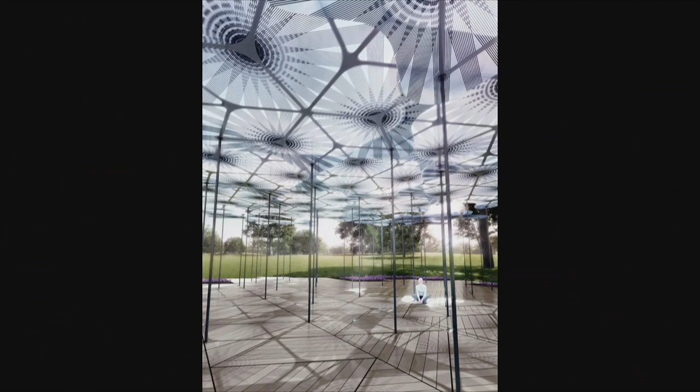the rain in at the edge, and that it would be incredibly delicate because we want this pavilion to sway in the wind. And the columns that support the pavilion are only 35 millimeters in diameter. And so when there is a wind, the whole structure sways. What's nice about a pavilion is you're not constrained by the usual constraints of buildings. And so the idea that you can design something that will respond to the climate became very important to us.

So this is the first render that we did, and we'd imagined this series of interlocking petals and very slender columns, and that the petals themselves would be translucent, but they would also let light in between them around the edges. And we had a hunch of how to make this, but we'd never done anything quite like this before.

And I was very lucky that when I went for my first meeting, I was introduced by Arup, the engineers we work with a lot in London, but who also have an office in Melbourne. They introduced me to a specialist boat builder, started in the boat building industry, who work specifically with composites.

And we had a telephone conversation, because actually they're not based in Melbourne, they're based in Brisbane, about whether they were up for experimenting and exploring if we could create these incredibly fragile, slender petals that would let light in, but that would be stiff enough. And they were remarkable collaborators. And the solution that we came up with really was a collaboration. We could not have done it without them.

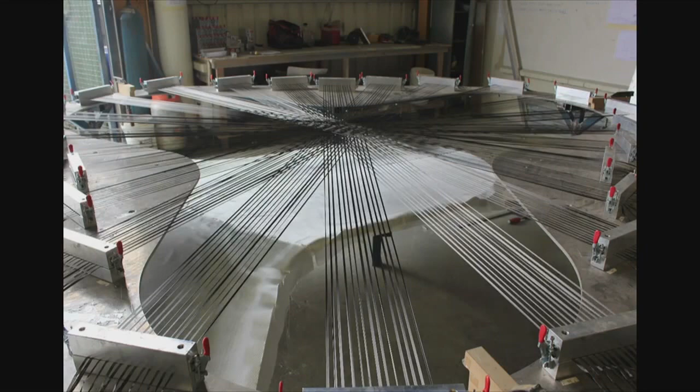So the idea was to use a translucent resin and then to put into that translucent resin carbon fiber strands that would stiffen it. And what was so extraordinary is when they started to experiment, because nothing had been done like this before, where you're using strands both as a decorative but also a structural material, to find the right degree of set of the resin. Because if you let it set too soft, the carbon fibers would just sink to the bottom. And if it was too hard, they would just float.

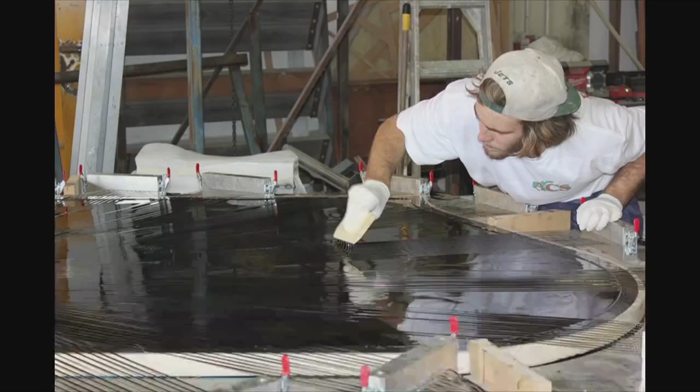And through a series of experiments, they realized that the only way to do this was to do it as a continuous process. So they had a 24-hour operation, and they worked in shifts. And to do something that pushes the boundaries, you need everybody to participate and to be as enthusiastic and as curious as you are.

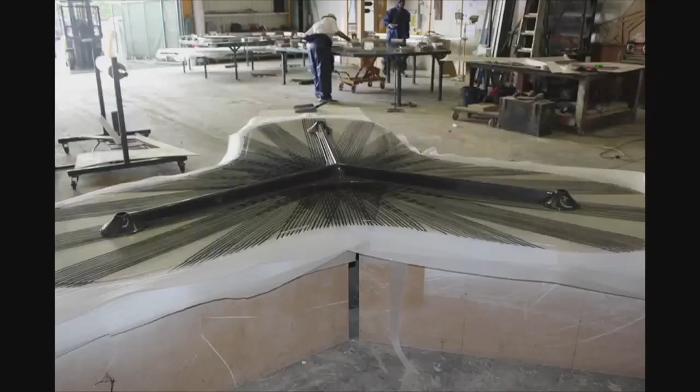And so the makers of our buildings are as important as the engineers, as the client and everyone else. So you can see how it's quite a kind of hand process. And then the carbon fiber ribs that connect the petals were actually vacuum formed. And there you can see a completed petal.

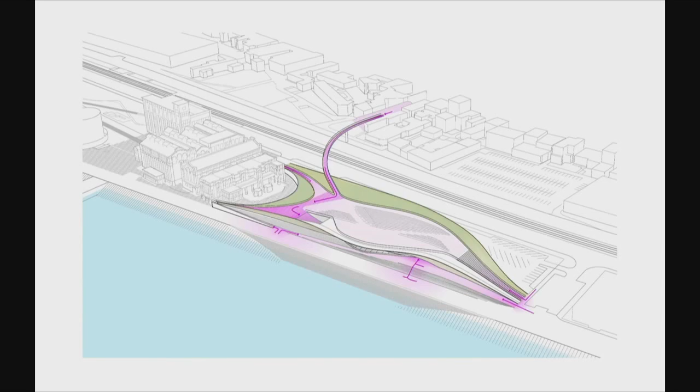And for a long time, the riverfront has been without any animation, without any activity. And this building, in a sense, consolidates a citywide initiative to regenerate the riverfront. There's been a lot of money invested in it, and this is perhaps the kind of finale because it is a destination in its own right.

Because it's next to the power station, there is a substation that actually sits below our building, and our building kind of sweeps around it. And that had to be moved, and that formed part of our project. And that power station actually powers the presidential palace, so it's quite critical that it

functioned at all times. And you can see how, with the sweep of the bridge and the gentle curve of the embrace of the substation, how the form of the building kind of emerged out of the constraints of the site, but also the movement along the site.

So what you're seeing here is the roof, and the bridge connects to the roof, and as it goes over the railway tracks, it lands in a newly landscaped square. But there will be no steps. Because of the height differential, you'll be at grade. So it's completely accessible in a city that is actually very difficult for people who are disabled or people with buggies. There's 7 hills, and it was important for us that this was a very accessible building.

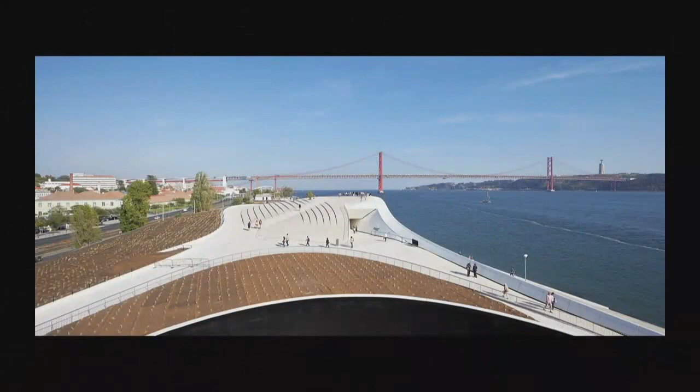This is the photograph of the roof. The brown will eventually be grass, but it's just newly planted. And the steps are facing down towards the city, so that when you're on the roof, you can not only have views over the river, which are fabulous, but you can also look back to the city, which is a perspective that has never been open to people before, because you couldn't get high enough.

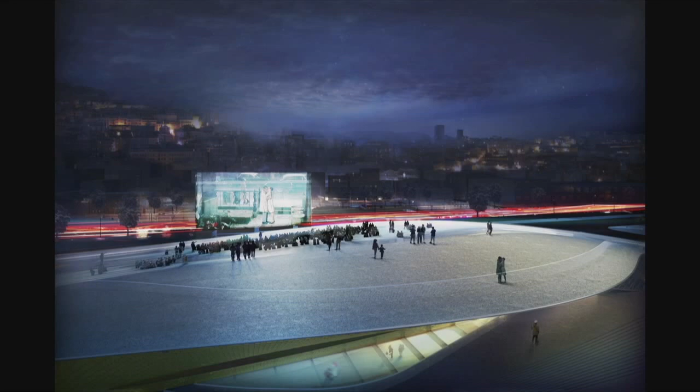But we wanted the building to be very low in order that from the river you could still see the old city, and in the old city you could still see the river. And this was an early montage we did, proposing that during the summer months they will install a screen and show movies with the backdrop of the city. So you have both a physical link to the city, but also a metaphorical link to the city.

And the relationship with the old power station is important, because that power station is part of the wider art campus. And our client, EDP, who are the biggest energy providers in Portugal, they have a foundation. And this building and the whole art campus is about a privately owned utility company, actually majority owned by the Chinese now, giving back to the city.

And I think it's a wonderful example of a piece of patronage, if you like, from a privately owned company, because cultural buildings are increasingly funded by private money because there is not the public money to go around.

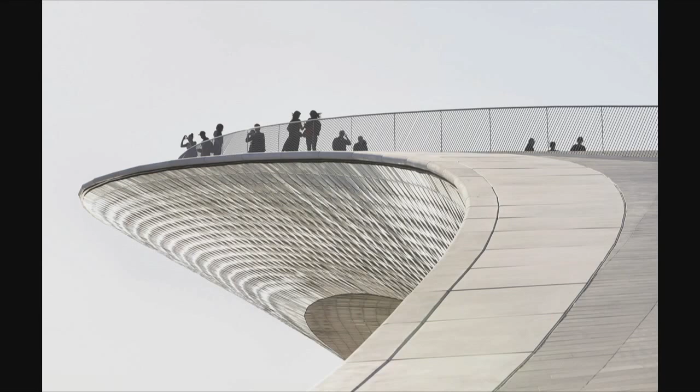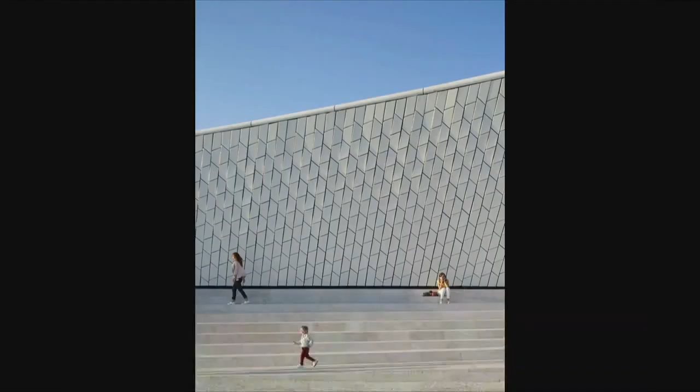The skin of the building is many thousands of bespoke ceramic tiles. And we worked very hard with Cumella, who are based just outside Barcelona, and they're a wonderful family business, and they've done all the restoration of the Gaudi buildings. We did actually look to use ceramic companies in Portugal who could certainly have done it, but what they couldn't have done was fix the tiles, and it was absolutely vital that whoever made the tiles was responsible for fixing them too.

So the tiles, we spent a long time designing and researching the quality of the glaze and the shape of the tiles so that it would very gently turn these corners, and that at a certain point in the curvature the tiles meet and form a hexagon, and in other parts of the building they're offset. And they're slightly three-dimensional, so you get this very complex reading.

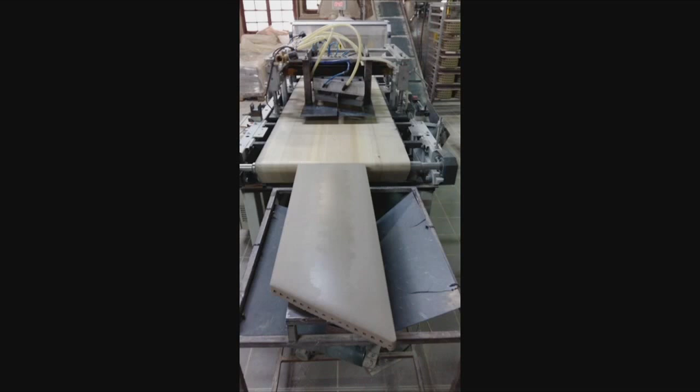The ceramic factory was, for months and months, given over to creating these, each tile by hand, a very artisanal process. And we spent a long time working with Cumella to look at the kind of glaze that would, because the site is so spectacular and the light is so beautiful, we wanted the tiles and the skin of the building to just amplify the changing light conditions that you get. And so we put a sparkle into the tile. And really there are times it looks silver, times it looks black, and times it looks gold.

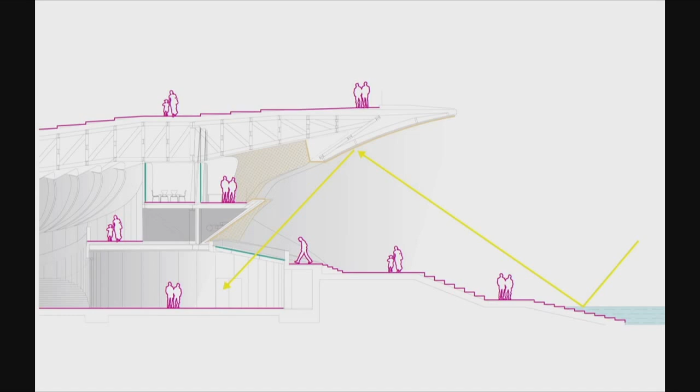So when the sun hits the water, it bounces off. It hits the underside of the cantilever, and the cantilever we did for two reasons. One, to create some very welcome shade along the riverfront, because there is no shade at all, and Lisbon has the most fabulous climate from March to November. But also so that we could use the underside of the cantilever, that is also tiled, to then bounce the light down through a roof light into the gallery space below, so that at a certain time of day, at a certain time of year, you will have a literal trace of the pattern of the water on the floor.

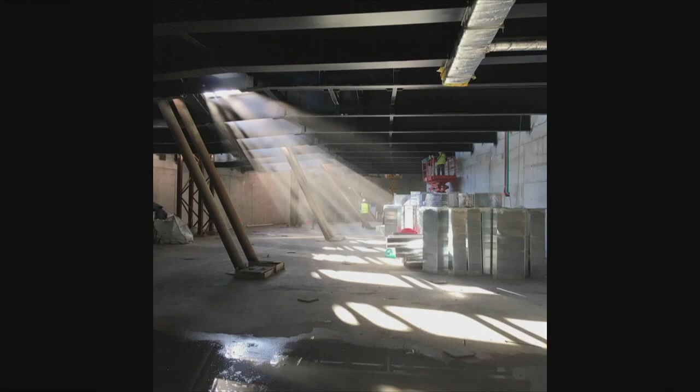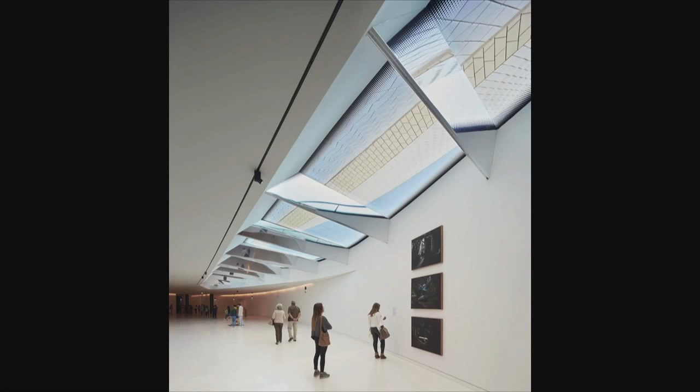This was during construction, and it doesn't happen every day, but when you get this moment of incredible sunlight that is let into a gallery, it's quite an unusual thing to let so much sunlight into a gallery space. You can, of course, use blinds to cut it off. And this is in the winter months. The roof light is designed so that during the summer months you only get indirect light because the sunlight would be far too powerful and too hot. But when you look up through that roof light, you see the tiles, you see the people, you see the sky. You have a really clear understanding of where you are.

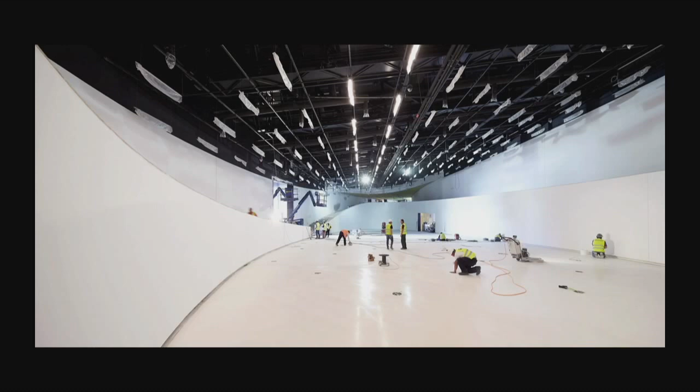This is an in-construction shot of the Oval Gallery, the principal space of the museum. When you come into the museum, rather counterintuitively, you walk down. And the reason for this was so that we could keep the building really low slung in relation to its neighbour, the power station, and also so that you can land on the roof and the roof becomes a part of the city.

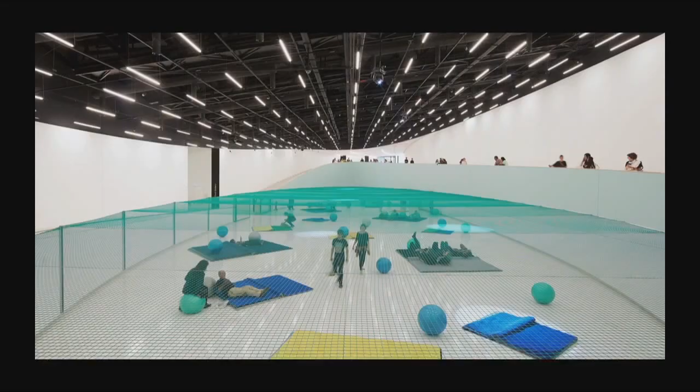This is the first installation by a French artist, Dominique Gonzalez-Foerster, who did a very site-specific piece. In fact, every exhibition, every installation here will be site-specific, and to some degree it will be a response to architecture, because this is a museum where there is no collection. It's about the convergence of art, architecture, and technology, and to try and create a discourse about the connections and the differences between the three disciplines. And because of that, we wanted all the spaces to flow into each other. So the public realm, if you like, becomes the gallery space, and each space flows into the other.

This is a room designed specifically for triple video projections. And this is a space that they call the project room, which will be used to showcase young Portuguese talent. And again, a very Instagrammed building.

And then the last project I'm going to talk about is the work that we've been doing for the Victoria and Albert Museum in London. We've been working on this for 5.5 years. It's a competition that we won in 2011. And the big event of this project is the gallery space, but the gallery space is below ground. And the paradox of doing the biggest project the V&A have ever done in 100 years, the paradox of it being invisible, is actually what drove the thinking of our project.

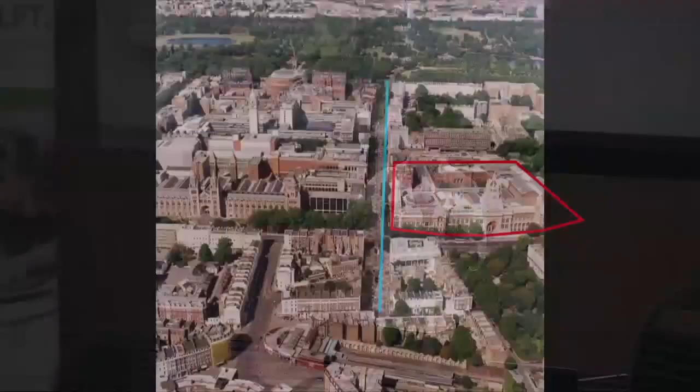Because we reflected on that before we'd even started designing. And we came up with the phrase, making visible the invisible. And it's a very abstract notion, but it's a notion that has driven our thinking at a micro scale, but also the macro scale. So that's just an image of a render of the gallery. So to come back to where it is, it's in London, it's between South Kensington Tube Station and Hyde Park. And Exhibition Road has now been semi-pedestrianised. So it's a street where really people just take time to wander.

And it's full of museums, Imperial College, and it was the route to the Great Exhibition in Hyde Park and Crystal Palace, so it has huge history. And what we wanted to do, being really quite inspired by this newly pedestrianised street, which is becoming more and more common in cities because it's so much nicer to walk without cars, was could we try and renegotiate the relationship between the museum and the street.

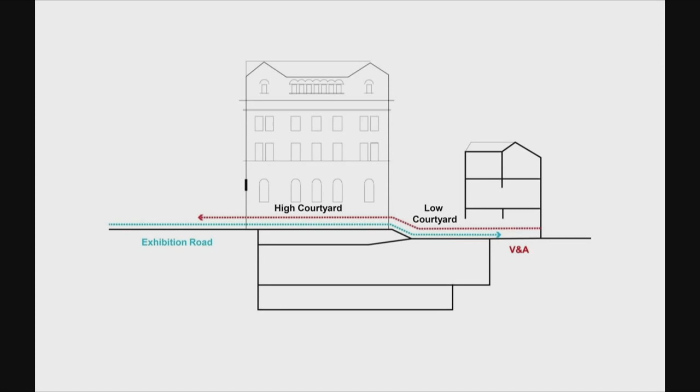And so what we did was to take the street into the museum and take the museum out onto the street. And we did this by creating a courtyard, but two levels of courtyard, because the level of Exhibition Road is 2 meters above the level of the entrance to the V&A. So we had to negotiate that level difference. So we create a maximum area of high courtyard, which then flows into an area of low courtyard. And this courtyard is a new public place in London.

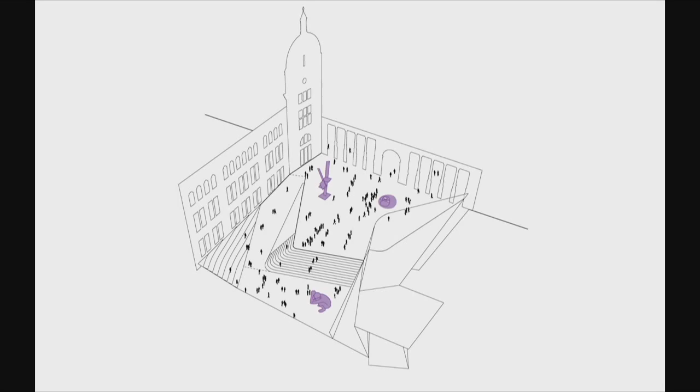It's interesting because on this site, originally Daniel Libeskind won the competition and got planning permission for a building. Fortunately, it didn't happen for me. And what was so interesting, it was a 5-6-story building. It was quite bombastic. And all the spaces inside were at the service of the architecture, if you like. Anyway, for one reason or another, it didn't happen.

And I think that moment, in London at least, for me, marked the end of the building as icon. And what I became more interested in was the iconography of place. And that's very much what this courtyard is about. So it's a place for installations, it can be curated, you can see it as an outdoor gallery, it's a place for parties, but more than anything, it's a place for appropriation by the public.

And for me, the success of this project will not be just the gallery, it will be when this courtyard becomes a destination and a place in its own right, where people just go to meet and hang out and have an assignation. But in order to create this courtyard, we had to deal with history. And this is the Aston Webb screen. Aston Webb designed much of the V&A. And it presented a very formidable and opaque facade to the street.

And even at competition stage, we intuitively understood that the key to unlocking the potential of this site would be to open up this screen. But as you in Italy know better than we do, when you have a Grade 1 listed building, which is the highest level of heritage protection, the presumption is you do not mess with it. It's maybe the right presumption, but you must be daring enough to challenge it. Because if we'd left the screen as it was, there's no way that the courtyard would have the same resonance.

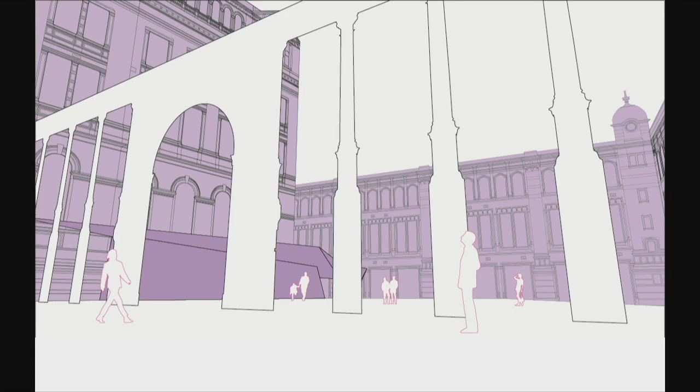So we went back to English Heritage and said that the screen was originally designed to hide, the boiler rooms have long since gone, and now its purpose must be altered because it's about revealing, not hiding. And by opening up the screen, you suddenly reveal these extraordinary elevations of the V&A that nobody has really noticed much before, because the street is not really wide enough to have a proper perspective. And this is the competition render that we did.

So we placed the cafe in the area of sun on the left-hand side. So the idea is you can just drift into the courtyard. The threshold moment is very extended. There's no front door, there's no big entrance. You just drift in off the street.

And when you're in the courtyard, we've designed it almost as though it's a kind of outdoor lobby, because you can begin to have an intuitive understanding of the complexity of the museum. So you can see straight through the new entrance that we've created, through to the Madejski Gardens, which are behind. If you look to the right, you can see through to the Hintze Galleries. And to the left, you'll be able to see this incredible sgraffito wall that's just been cleaned and never been seen by the public. So you do have this very intuitive sense of where you are in relation to the museum.

And then we also designed an oculus that would look down into the void of the gallery space below, because going back to this notion of making visible the invisible, that was one of the more literal ways of understanding that the big event is below ground. And this is a view at night. So the oculus is actually now a lot more beautiful than this. This was the competition. But between the voids in the structure, you see down to the gallery below.

And we've conceptualized this oculus as though it were an empty museum vitrine, because what you're seeing is the structure that supports the courtyard, which is the ceiling of the gallery below. And the stainless steel balustrade, which doesn't read like a balustrade, it's something much more sculptural, on the inside where people don't touch it, it's highly polished. So it reflects back to you the structure and gives you a very kind of didactic reading of the project. And then we've painted the inside of the structure this very deep red as a kind of reference to the red velvet of old museum vitrines.

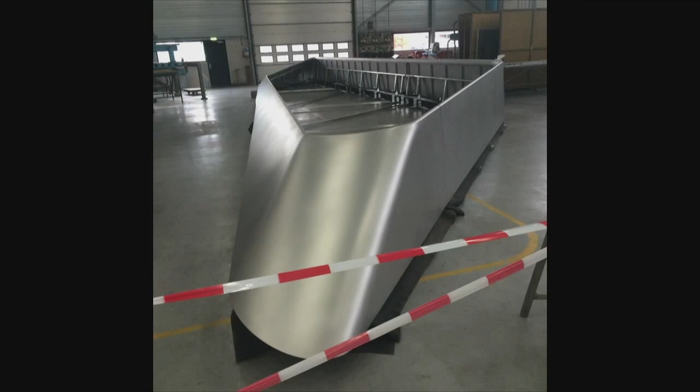And this is the outside face of the oculus, so you see it's much more refined than that rather crude angular one. It has much softer edges. It looks a bit like a TGV. And this was made in Holland by some extraordinary steel makers there, and has been delivered in 3 pieces.

Then we had to make a new entrance into the museum itself. And so it was very important to us to make a legible distinction between what is old and what is new. So where we had to create a new entrance, we literally just sliced through the stone. But what's so interesting, in slicing through the stone, you reveal something that you haven't seen before. You reveal this incredible profile, which is the fenestration of the other windows, but you're seeing it in a different way. So sometimes by taking something away, you can show more.

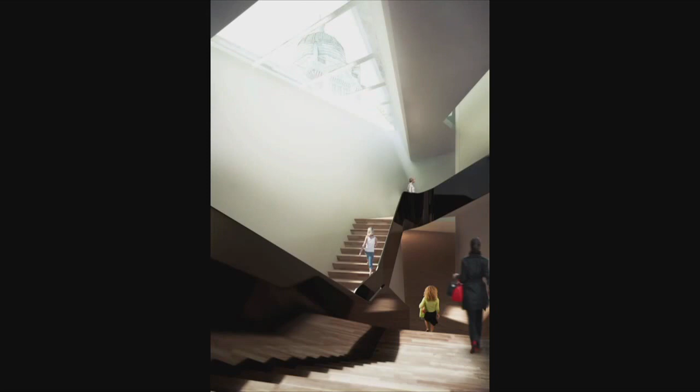And then when you've come into the museum, into the new entrance hall, there are 2 stairs. There's one to go down and one to go up, and there are 2 reasons for that. It's partly to deal with the volume of visitors, because this space is going to be for all the temporary shows, all the blockbuster shows like the Bowie, the Alexander McQueen, and the Pink Floyd show.

But it's also that I'm a bit of a purist, and my biggest critique of the V&A at the moment, and it will still happen after this project, is that you enter the museum through the shop. And I understand that the shop is a very important part of a museum's revenue. I totally understand. But I feel it's a little crass to enter a museum through the shop. So by having 2 stairs, you exit through the shop. So you're obliged to buy a book on your way out.

But it's your reward after you've had your cultural visit. And what you can see here is, now we're inside the main museum, this interweaving of history and modernity. Because when you go down, and we've gone down a long way, into a space, it can be very disorientating. And so we've made sure that there are always views that we've created with roof lights, so that as you go down or as you're coming up, you see a different part of the museum. You understand where you are, so it's less disorientating.

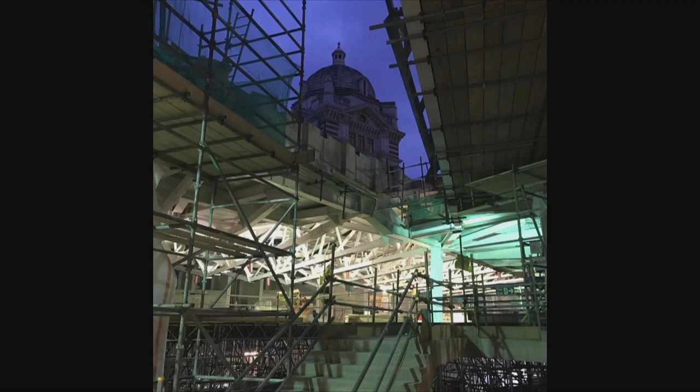And that is the reality of the view. It's much more complete now, but it's a very literal reading of what we've done. And then the ceiling itself and the structure: most people in the competition, because that was the brief from the V&A, created a white box or a black box. And our take was that, first of all, that's just not the V&A. The V&A has this very rich history of neoclassical, neo-Gothic, decorative ceilings. And the V&A is a very didactic building. Its mission is didactic. Its collection is didactic. Everything is didactic about it. Its ethos. And we wanted to reflect that.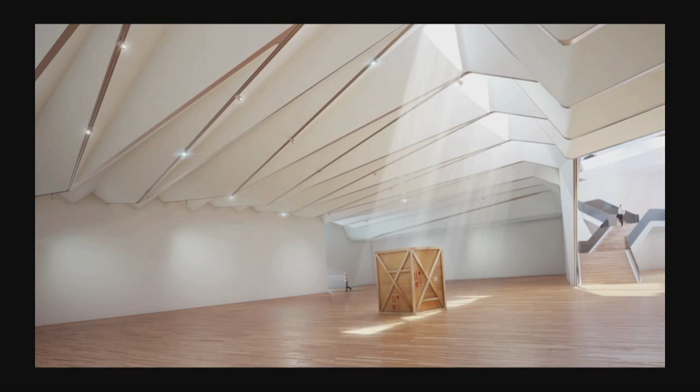And this again is a competition drawing, but we wanted to design a ceiling that reflected its sense of purpose, structural purpose. So this ceiling structure is in a sense purely a response to the structural challenge, which was to span 38 meters. And it's a folded steel plate, but it's a very complex ceiling and a complex geometry.

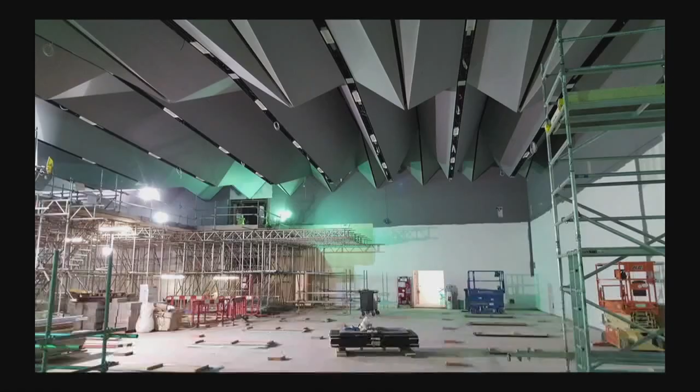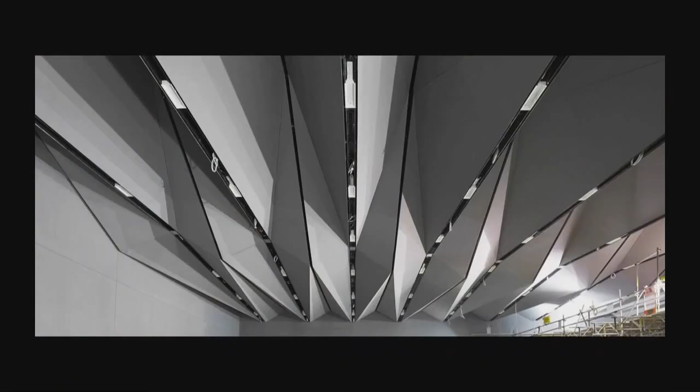And this is during construction. Again, it's a little more complete, but you can see that this ceiling does more than just span 38 meters. It has all the AC, it has all the lighting, it has all the paraphernalia to do with audio-visual. You can hang a car or an aeroplane from the ceiling. It's working very hard. You'll see that it's gone grey, and the V&A love grey, and we love the V&A, so it's grey. And here's a slightly more focused shot where you can see that because of this complex geometry, you get a very nice reading of the form, although the lights for most exhibitions will be from above looking down.

And then you've been to the show, and you're coming up the staircase to go out. And actually that's Obama going up the stairs. It's like he's gone now, and we're going to miss him.

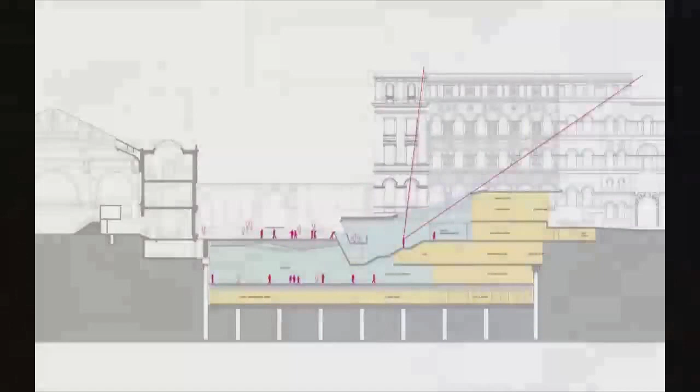In the balustrade of the stairs, which are very glossy, a very highly polished lacquer, you can see, because of the views that we've set up, that you get a reflection of the Henry Cole wing in the balustrade itself. So there's always this interrelationship between old and new. And then as you come up the stairs and you enter the shop, you come into this very lofty, light-filled space. And there you can see, for the first time, what will be revealed, this newly cleaned sgraffito wall.

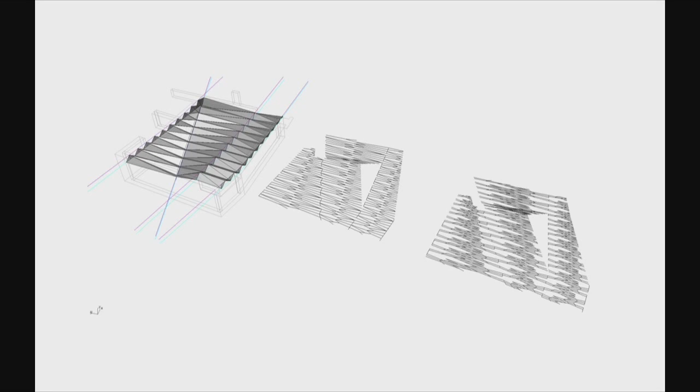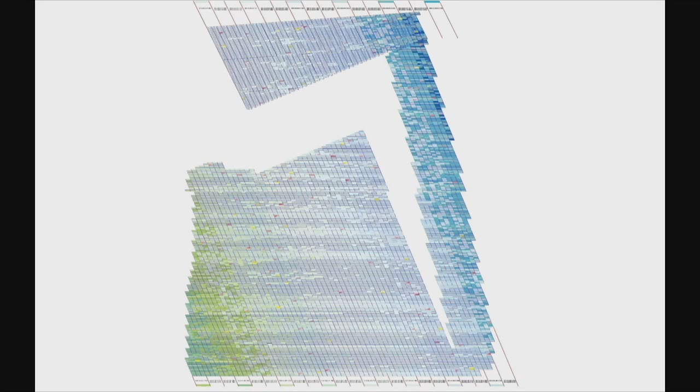And so from manipulating a three-dimensional surface into a two-dimensional plane, we get this very visually complex pattern, which is derived from the structure, but it's quite abstract. We wanted it to read as a color field, so that you didn't really read the big joints, and therefore all of the tiles are parallelograms rather than completely orthogonal. And this is the drawing that we did for the poor guys who've got to lay the tiles. So there are only 6 tile types, but they're all mixed up, and they all have their place. And then they're all one colour, except there are just a couple that are red and a couple that are yellow that are randomly placed. It's a bit of fun.

The colour of the glazing on these tiles, we were very inspired by the ceramic collection at the V&A, which is one of the most important in the world. And I've had a personal tour several times from the keeper of ceramics, and to be taken round a gallery and be spoken to by someone who knows more about the subject than anyone in the world is a very humbling experience. And these beautiful Chinese glazes, the Celadon, very pale bluey green, and when the glaze falls to the bottom, the colour is more intense, it's kind of pooling, and we wanted to somehow recreate that.

Although we know that we have to have a courtyard that is volume produced because it's massive, we wanted it to be a kind of merging of artisanal and volume production, because again that speaks very much of the V&A's ethos of marrying arts and crafts with industry, which is where they started.

So we did 2.5 years research into ceramics and porcelain. We didn't hold up the project for this. It's really important. We had that latitude because of the phasing of the program. But at the beginning, we didn't know what would be the solution. We didn't know how we were going to get there. We knew what we wanted, but rather like with Melbourne, we didn't know how to get there. And it took research and working with various makers and manufacturers.

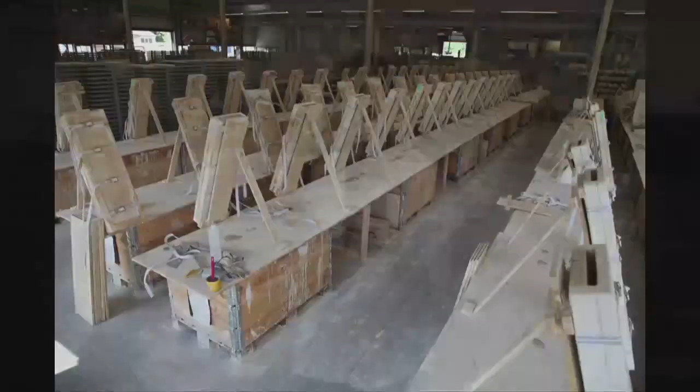And while we were doing that research, we came across Tichelaar, who are the oldest manufacturing company in the Netherlands. And they're a family-run business. And they work with porcelain and faience, for elevations. And we saw this porcelain clay, which was so much more beautiful than the kind of biscuity ceramic clays that you get, which are a little bit rough, a little bit brownish. And the porcelain-based clay is this very nuanced grey, with a little bit of blue, white. It's very, very fine. It has a finesse that ceramics don't.

And we fell in love with this material, but it had never been used in a public place before. And yet porcelain is one of the hardest materials. It is harder than stone, it is harder than granite. And it's completely vitreous, so there's no problem with frost, but the issue was non-slip, because nobody had used it before. So we had to work with Tichelaar, they did most of the work, in finding the additive that would give the friction to allow us to use this as a surface in a public space. And of course it went through a huge amount of EU testing in order to verify its properties.

And again, this factory in the Netherlands, just outside Rotterdam, was devoted, and there are hundreds of thousands of these tiles. And they're slip cast, so it's a very artisanal process, and they are not rectified after they've been poured, because we wanted to reflect the handmade feeling in the design. So this is a parallelogram. You can see the mold.

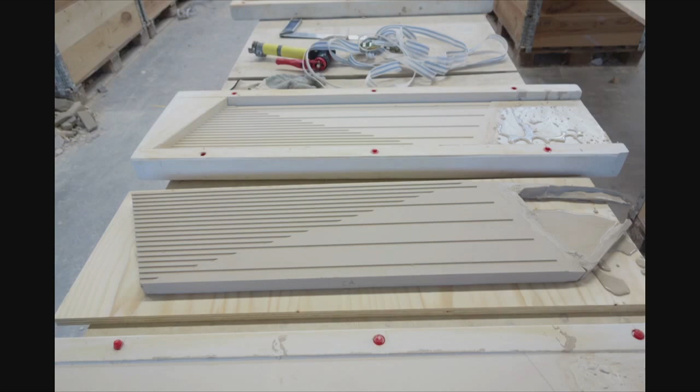And to make matters more complicated, we wanted to use a glaze. We wanted to introduce colour into the courtyard because it has such important messaging. But we know that a glossy glaze is very slippery, so we cut grooves into the tiles, and they're thin enough so that your heel never touches the groove. So that enabled us to have beautiful glossy glazing that, after the rain or in the sun, will sparkle in a way that is quite unusual in a public place.

And that is a dry test fit of the actual tiles. You don't really read that they're parallelograms, but this idea of taking a diagonal through it was again to increase the visual complexity, although there are only 6 tile types.

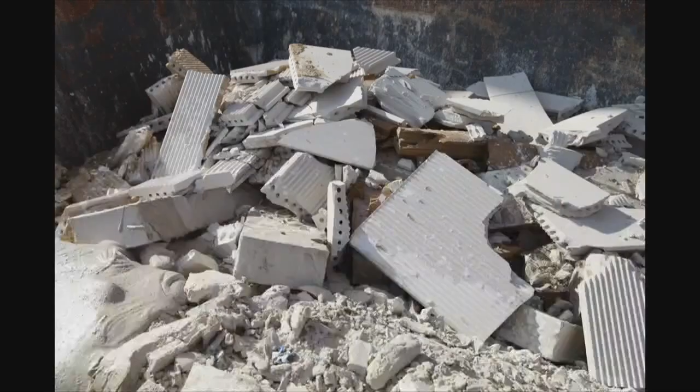And then we thought that we would try extruding porcelain for the cafe roof, and porcelain has never been extruded before, and there is a reason, because it didn't work. So this is the result of many months of testing, but we had to accept at the end of this testing period that it wasn't going to work. Maybe with more time it could work. So the tiles for the cafe roof, which are more diamond shaped, are also slip cast.

And the glaze on them is so subtle. We have a diagonal again, and half of the tile has a glossy glaze and half is just the porcelain. But the glaze is so subtle that when they put the glaze on, they couldn't remember if they'd put it on or not. And so they had to add a chemical to it, this blue chemical, which was burnt off during the kiln, so that they'd know when they'd applied the glaze before it went into the kiln.

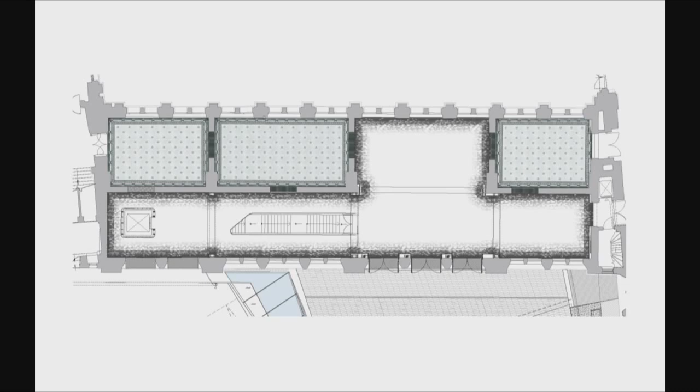And this is a plan of the entrance hall. So you see the 3 entrances that we've cut, where we cut through the stonework. And on the floor of the V&A are really beautiful mosaics, and there's a great tradition of the borders of the mosaics. But we had to take up the mosaics in order to do the work.

But we've kept them, and we've washed and cleaned them, and we've relaid them as a border to reference the pattern of the courtyard. And actually these mosaics have been done in Italy by a wonderful group of women who sing as they do it.

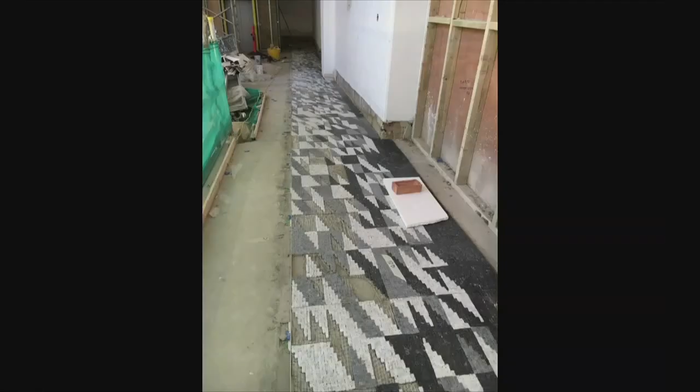And there you can see the border of the mosaic, and in the spaces that have no mosaic, that's where the terrazzo will be. So it's as though the edge just bleeds into, there's no hard edge, but it's a soft edge that just merges into terrazzo. And then back to the history that we had to negotiate.

What was so interesting, after we'd got permission, after 9 months of negotiation, to alter the screen and open it, we then had the paradox of having to close it at night, because although this is a public place, it belongs to the V&A, it's a priceless collection, you have to secure the museum at night. And there have to be gates that withstand the impact of a terrorist attack.

And yet, however you do it, these gates have to be enduring, they have to have gravitas, and they have to be beautiful. And we looked at so many ways of doing it. We looked at using glass that electrically went into the ground, or bollards that disappeared into the ground, or conventional gates, and everything. Nothing worked for us. Nothing felt that it had this kind of enduring quality.

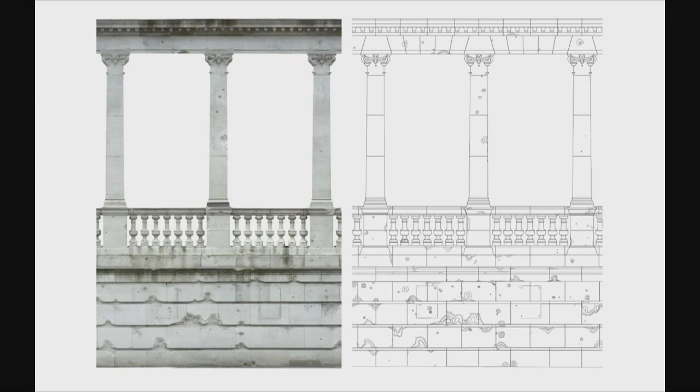At the same time, in order to do the work, we've had to take down the whole screen, and each stone has to be labelled, and it's taken off site, and then it's put back in its altered state, and the stones that are not being put back are there just in case one day somebody wants to. And in order that we could mark these stones, we commissioned a survey drawing,

and when that survey drawing came back, we knew how to solve the problem, because on that screen you can see on the left there's the shrapnel damage from World War II, and it was a very emotive part of the whole. You're taking away this very important part of history, but we're not taking away all of it. So when that drawing came back, it maps the imprint of the shrapnel damage. So we wanted to find a way of mapping that, of making visible the invisible, of memorializing absence with the design of the screen.

And this is a 25 mil thick piece of aluminium for which we designed a piece of software. It's perforated, but all the perforations are at different angles, so that from certain vantage points it looks very dynamic, but now you see the imprint of the shrapnel damage. So as you walk past it, it will be made visible.

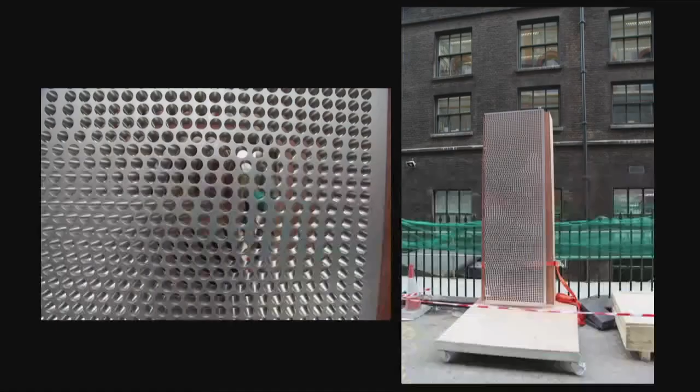And this is a mock-up that we did on site just to demonstrate. And on the right, you can see that it is really quite visible, and you can understand the different angles of the perforation.

And there exists an inscription on the stonework that talks about how the museum withstood the attack of the Blitz and how the enduring values of the museum are in a way represented by this shrapnel damage, and we're putting a new inscription below that speaks of what we've done and how we're memorializing it in a different way.

And then this is a museum there by Royal Charter, and it wasn't part of our brief to incorporate the Royal Crest, but Mark Jones, one of the directors of the V&A, said something that really touched me at a very early meeting. He said, it's very important that people, but particularly politicians, remember why this museum is there. And I thought, well, then let's find a way of giving a more modern reading of this rather hideous crest.

And so for the centre gates, we've perforated just perpendicular through the 25mm aluminium to give you a very blown up version of the Royal Crest, which speaks of its history, but also it speaks of modernity. And here you can see this very easy way into the museum.

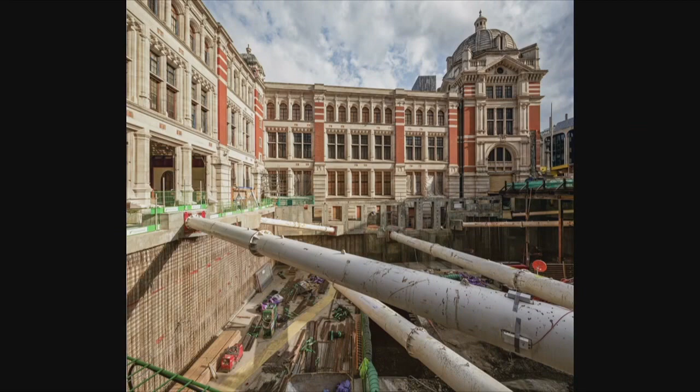Now, towards the end, I just want to talk about this structural challenge, because I think it's important to talk about that, particularly in Milan and in Italy. This was a very, very daring project. We've dug down 15 meters. We have piled and underpinned within 1 meter of a Grade 1 listed building. The museum remained open to the public the entire time. The collection was still there, priceless collection.

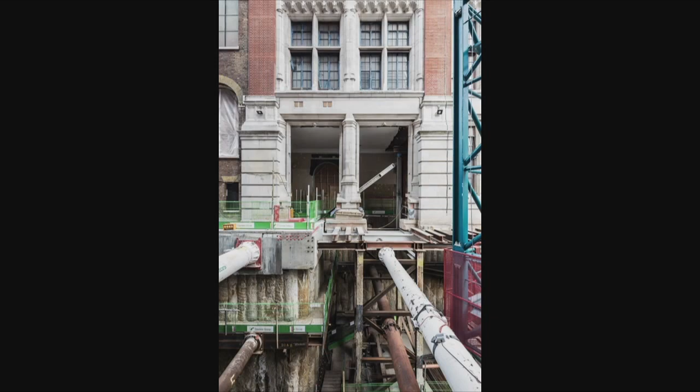So the structural challenge was immense, and what you see here are the props that are literally stopping the elevations from falling in. And I think, if we had shown the client what digging down so close to their museum meant, in reality, we would never have won the competition. It is very daring, but we've worked with Arup, who are the most extraordinary engineers. And you can see here how literally the weight of history is being held on these beams.

And what is so interesting, Arup worked quite closely with Cambridge University, and Cambridge University got to hear of this project, and it is quite extreme. And so they have installed, purely as a piece of research and at their own expense, fiber optic monitoring cables into the tension piles. And the tension piles themselves go down 50 meters, because usually when you dig a big basement, you put a big superstructure on top, a high-rise, a multi-story building, but we're just putting a courtyard. So the slab just wants to float, so you have to hold it down with these massive tension piles.

And Cambridge University think that the movements and uplift that will be recorded after the work has finished might actually disprove the elastic theory, which is the theory that the engineers use to calculate how to build something like this. And if that happens, we will have advanced knowledge in a way that we never imagined at the outset. But these kind of gifts happen if you really push something, if you really test something to its limits. This is the new entrance hall.

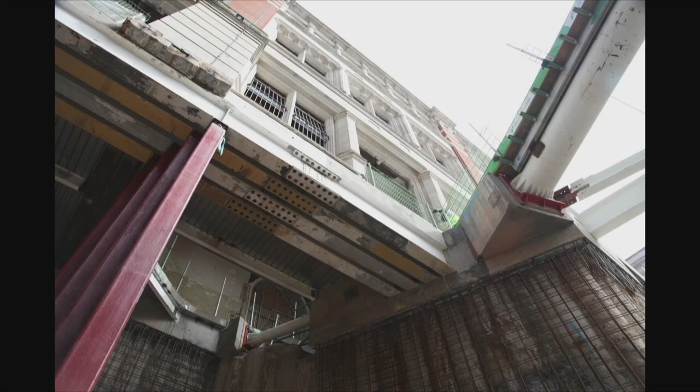And again, you can see the weight of history. Now, interestingly, the columns there that you see in that red oxide colour. In the animation I'll show you in a moment, originally we designed them to be white and blend in with everything else. But when I was on site, you see the kind of visceral work that these columns are doing, holding up the weight of history. I thought we have to show that, and we are painting them in a very bright red oxide paint, and the beams as well, so that you just have a sense of the work that they are doing.

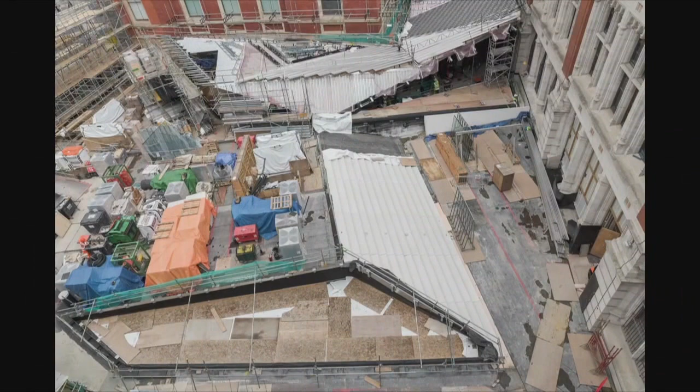And this is a slightly more recent site photograph from above. The museum opens in June, and this, I hope, will just consolidate everything that I've spoken about. So there is the Aston Webb screen with the perforated walls. You just drift in off the street into the courtyard. The cafe in the area of sun. The courtyard's actually a much more beautiful, subtle colour than this. This was done at a very early stage. That's the oculus looking down that is conceptualized as the empty museum vitrine. You see the relationship between the modernity of the design, but also the history.

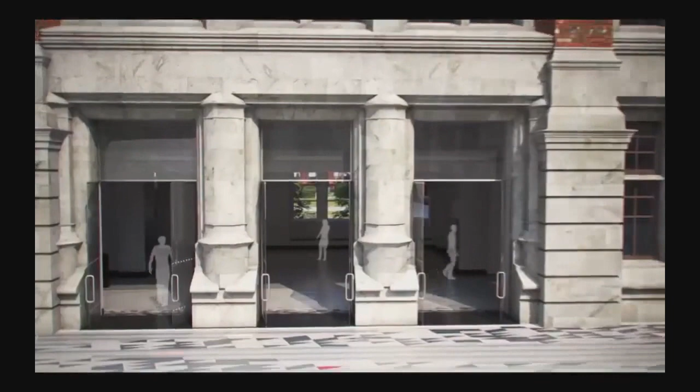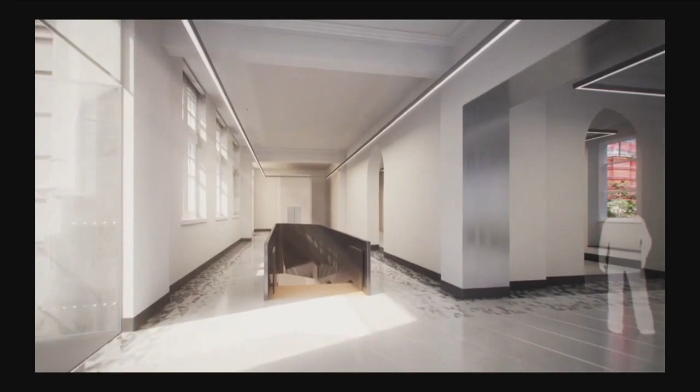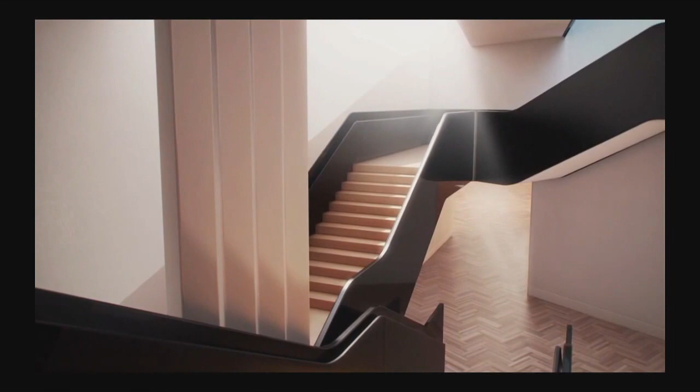You come down the steps, or you can go down the ramp, and you come in through one of the 3 new entrances. There you see through right to the Madejski Garden. It's a smallish entrance hall, and then you go down the stair. There is only one stair to go down, or you go the other way and you connect into the rest of the museum. So there you see the 2 stairs passing each other by, like ships in the night. There are those columns which are now very bright red oxide.

And we've manipulated the light. So when you get to the bottom of the stair, there's more daylight than at the top, even though you're 12 meters below ground. And it just makes you feel more comfortable. And there's this magic moment where light will come through the oculus. So you see it was originally white.